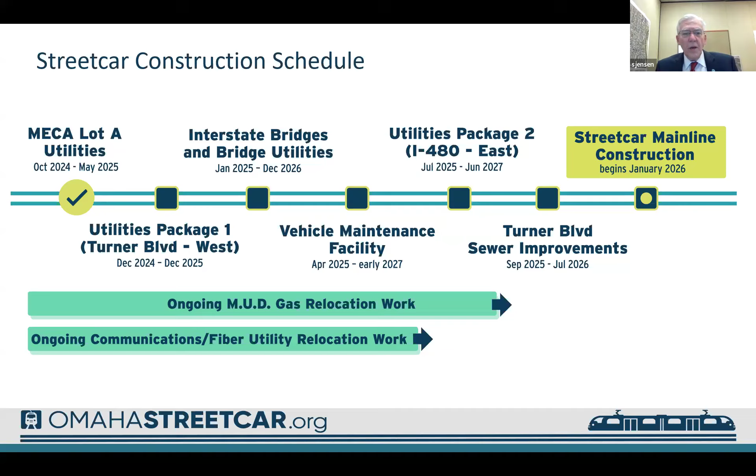Mainline construction work is going to begin right after the first of the year. MUD gas relocation work is continuing; Megan will talk about that. And then ongoing communications and fiber utility work throughout the whole corridor is underway and being coordinated with the other work. So with that, I'm going to turn it over to Megan to talk about MUD work.

Thanks, Steve. Hi, everyone. MUD has completed relocating the gas mains along Harney between 10th and 19th Street in the Old Market area. Our gas service work for the JAMS building is completed, and the excavations for this work have been turned over to the city for repair. The alley work behind the Dubliner is completed, but work continues on the remaining gas service in this phase for the Voodoo Taco building.

The crew has completed extending the gas main along 11th Street from Farnam to the north side of the Voodoo Taco building and has installed the new gas service. This building's gas service will soon be reconnected. The crew is currently backfilling excavations and should have the street repair turned over to the city by the end of this week. Traffic continues to flow on 11th Street.

However, parking in the area continues to be impacted. We do want to point out that the big parking garage located at 12th and Harney is available for parking, as well as other parking garages.

I also want to point out the fact that every single one of these businesses continues to stay open. So if you would like to continue to go to these businesses and support them, that would be very much appreciated.

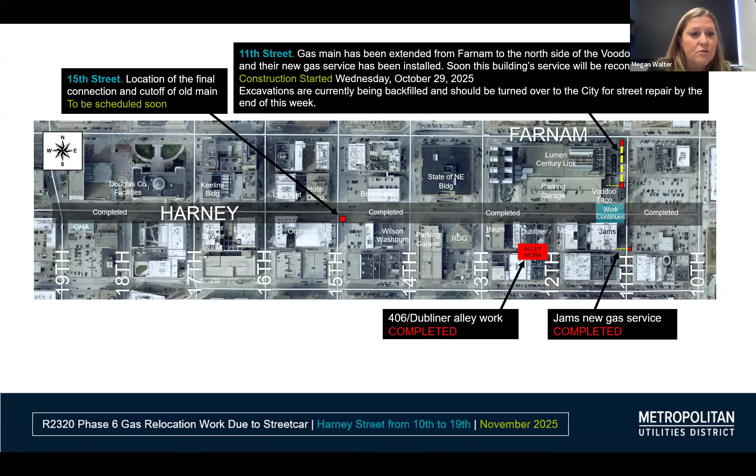Drivers and pedestrians are advised to use caution near excavation in this area. Soon, the final connection will be scheduled at 15th Street. The anticipated completion timeline for this corridor's work is within about 1 month.

Our next phase, phase 5, is Farnam between 19th and 28th Street. MUD has completed the gas main installation along Farnam Street between 24th Street and 26th Avenue. Crews have begun gas service work in the 25th Ave for all makes building, and will soon perform service work in 26th Ave for the Farnam Hills building. These two services are being relocated off Farnam Street.

Lane restrictions will be in place for this work. All available excavations within the project area have been turned over to the city for street repair, and traffic control measures have been removed where possible. Work also remains on Farnam between 19th and 20th Street, which will be scheduled at a later date. Phase 5 work is anticipated to be completed in early 2026.

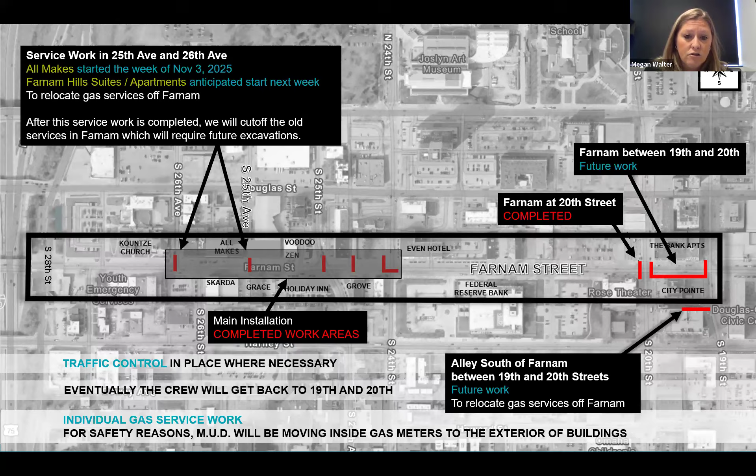Our next phase, phase 7, is Harney near I-480. Our gas main installation work for phase 7 is now complete. Individual gas service work is continuing to happen along this corridor. Please watch for lane and parking closures associated with this activity.

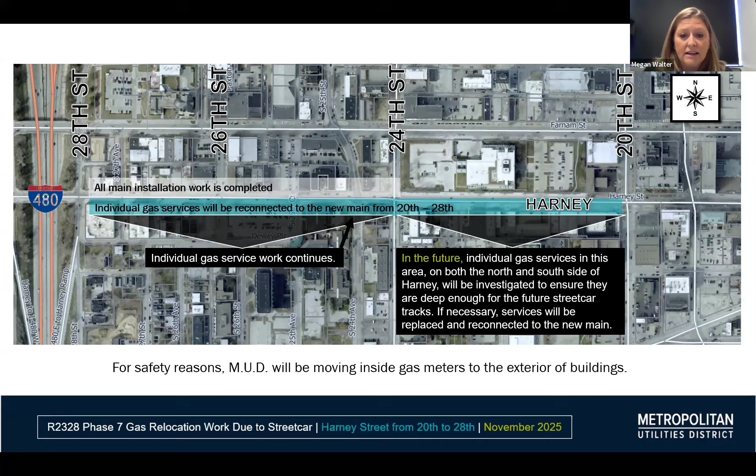This fourth slide shows all 8 phases of the MUD gas relocation work. Work in phases 5 and 7 continues, and phase 6 is nearing completion. Our final phase of gas work is phase 8, located near Turner Boulevard.

We anticipate this will start in approximately 2 weeks at the intersection of Turner Boulevard and Farnam Street. Traffic control in this area is currently being considered by MUD and the city of Omaha, which could include closing Turner Boulevard so the work can be completed as quickly as possible. So please be watching out for that.

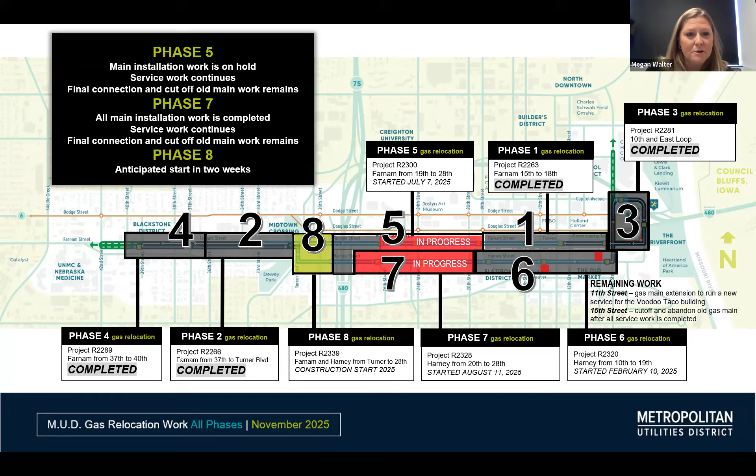Now I'm going to turn it over to Mike True and Steve Rue to discuss the vehicle maintenance facility, West Utility Package, I-480 bridges, East Utilities Package, Turner Boulevard Package, and mainline construction. Mike, I think you're up first on the vehicle maintenance facility.

Yes, I am, Steve. Thank you. So, vehicle maintenance facility, just a quick recollection of where this is at. East End, there's a loop, 10th to Capitol, Douglas to Farnam. This is kind of the northeast corner, near the Luminarium. You can kind of see that general area in the left picture up on the top side of it.

For those of you who've been down here, we've been finalizing our foundations and getting all the steel set and all that concrete poured. It looks right now just basically like a big concrete slab surrounded by an open field that's been tore up. But excitingly enough, in November, about another week or two, we're going to start seeing this structure go vertical. There's a crane down there now that's getting assembled to start putting pieces into place.

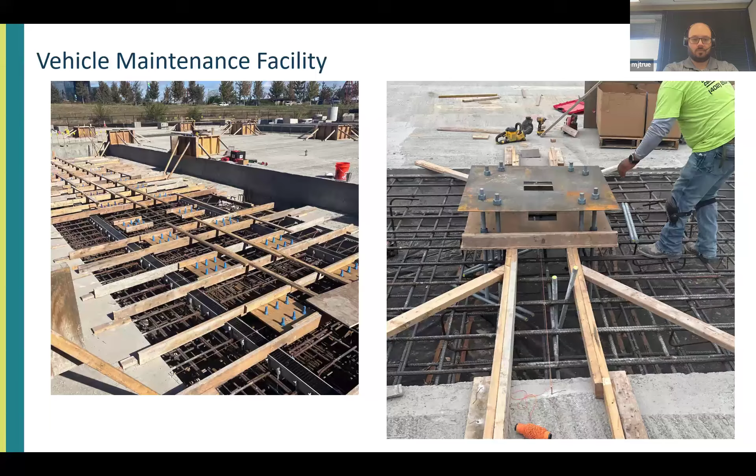The vehicle maintenance facility is on track to generally be open in the first part of 2027, with the streetcars set to arrive that summer. And we'll have more updates as we continue along. And then I believe next is Mr. Rue.

Awesome. Thanks, Mike. I'm going to work through our utility packages in the order that they came online. So starting with the West Utilities package, this started back in January, and we are rapidly approaching the end of this first package here. So we started back on Turner. We've been working west right now. We're in this phase 3 from roughly 37th Street through 40th.

Obviously, the really key issue that's going on right now, we have that full closure at 38th and Farnam as we work through some water main connections there. Right now, we believe that that work will be complete still in the 4-week time frame. So that started October 20th, and we are looking at that another week and a half from where we're at here to get that poured back. We should have updates as we get closer to finishing out that work.

For the rest of this phase, we're still just doing the same work that we've done in the previous phases. So we're finishing out water main work, sanitary work.

When that all gets put back and poured, all the pavement gets put back, then we'll see that CIPP lining crew come in and do the structural lining of the sanitary sewer, just like we've done for the other two phases. We'll kind of start seeing this wrap up.

Right now, phase 1 is completely done. Phase 2, we're working through what we call punch list items, just a few little things left behind here and there. Phase 3, we're coming to the end, and we'll see that punch list situation happen again. This first package is really coming to a close here.

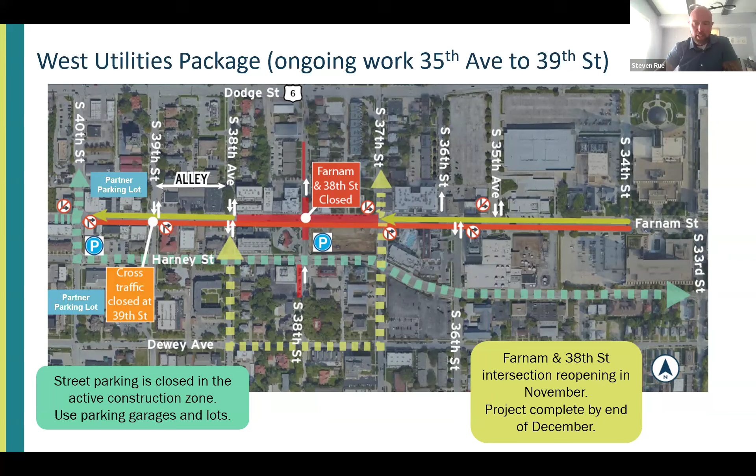So that's where we're at with this package — we're coming to an end. Going to the bridges, like Steve Jensen mentioned, going awesome. First bridge is almost complete. We're going to look at demoing Farnam going into next year.

If you go through there right now, we still have the closure coming off of 480. The target date we have for opening that exit ramp off of 480 is 11/14 — two Fridays from now — and that'll be a straight through to Douglas. We still have some signal work and paving to put back, but we are going to open that exit, so you'll be able to go straight through to Douglas and take that back to the east.

We're anticipating the rest of the work related to the full opening of the bridge to be completed by the end of the month. We should have all the bridge work that's left, which is very little if you drive by, plus a lot of the signal work, some paving, and the ADA ramps that need to go back in. We're hoping to see that all completed by the end of the month, allowing full access through that intersection with our brand new bridge.

Some other work happening over there — if you drive by on 480, they're pouring the slope protection under the bridge. The west side is currently being graded out, and the east side is actually halfway poured down the hill, so you can kind of see that usual concrete slab under bridges taking shape.

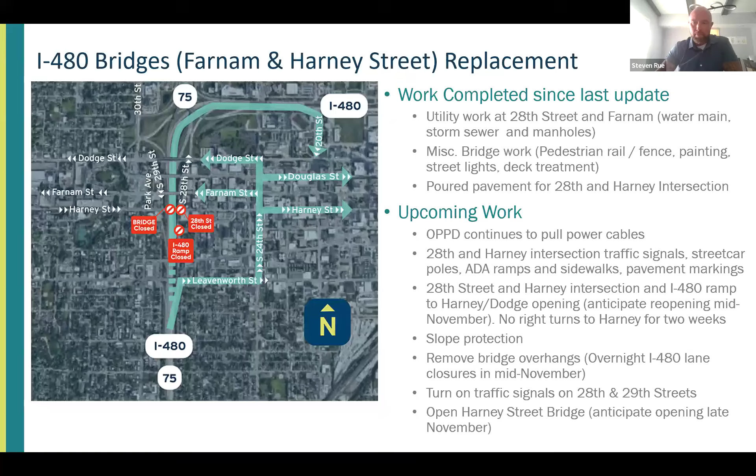8th and Douglas, there's a pretty substantial amount of work still to be done under there. We have sanitary and water work still to do, so that's going to be later in the month. Moving out west, to summarize, there will be some access, but as we close up one area, we just move those crews another block or two and continue that work. Hopefully the route you need will become open, but those crews are not going to go away - they're just going to keep sliding west and moving through intersections as they go.

Other work we have going on: Farnam from 10th to 15th, that's happening right now. Harney 19th to 17th, it's actually kind of like 18th to 20th now - we have electrical work going on out there, as well as Farnam from 18th to 20th. And then I think we have Harney from 19th to 24th. That has not started yet, but that is upcoming.

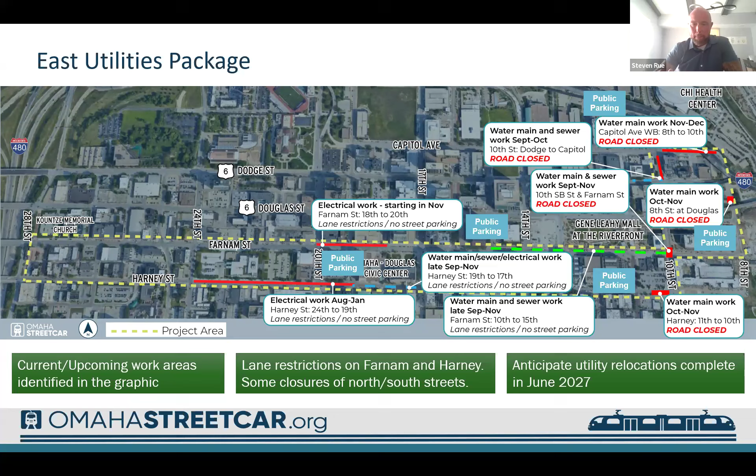Turner utility package - this is again the smallest footprint package that we have of all the utility packages, but it is a really complex project. It involves some very deep sewer manhole work that needs to happen here. Right now, most of the work that's occurred to date has been a lot of potholing and locating, ensuring we understand where all the structures and pieces are, that we have them documented, and that we're doing our shoring design for this very deep work that's going to occur here.

Coming up in January, this intersection will be fully closed for 4 months to do this work. It is not safe to keep this intersection open - not safe to the traveling public or the construction crews that are there. I know we're 2 months away from that, but this intersection at Turner and Farnam will be fully closed for 4 months to accommodate this work.

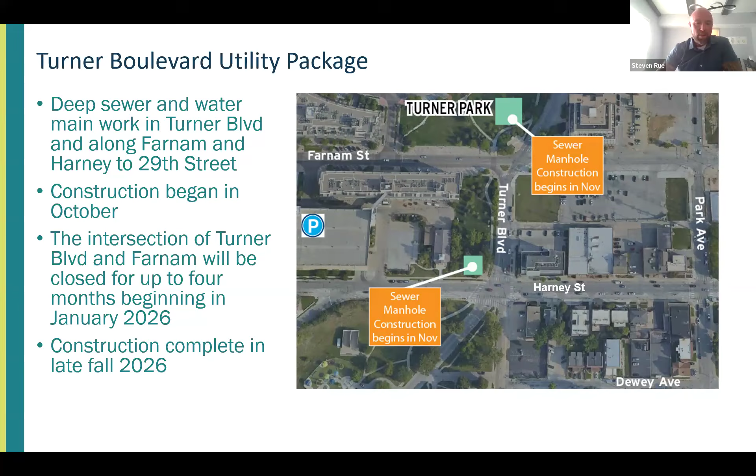And I believe the next slide is mainline, and Mike is going to talk about the mainline.

Thanks, Steve. So mainline construction, as you just heard with Turner, begins in the same area starting January 5th. Heading 1 is working a little past so crews don't interfere with each other. On the north side of Farnam, Kiewit will begin working along the westbound lane in the parking lane, tearing up and getting track actually laid in.

This will be exciting. These are the first direct streetcar elements, excluding what's happened down at the VMF.

The work included in the mainline construction are the stops, overhead electrical, underground electrical returns, conduit, and traffic signaling. Most of that's going to be just going pole to pole, traffic signal, or in the slab itself. It'll occasionally have drops that have to exit outside of that, but a lot of this work is linear. They're going to go one direction. It'll be a series of crews.

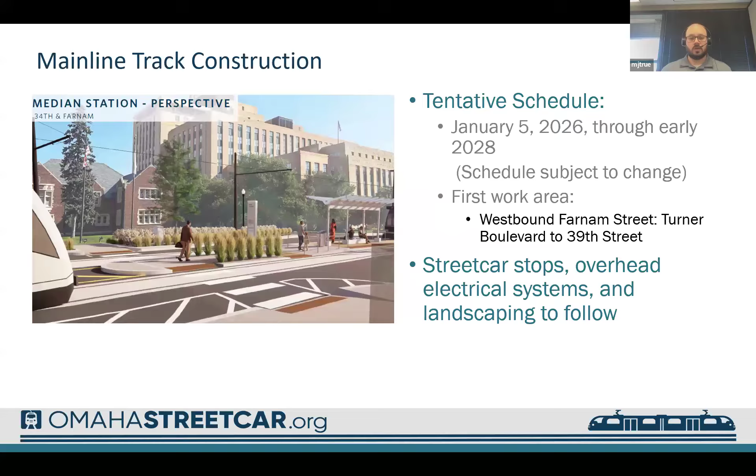We can get to the next slide. Let's see.

Following behind them, so real quick, the demo crew comes out and knocks out 1,800 to 2,000 feet at a time. They're one of the fastest crews that's going to come through. Following them will be a civil crew. They'll prepare subgrade, and there's some limited stormwater work along here. They'll also get a lot of your conduits in that actually have to get below the grade slab.

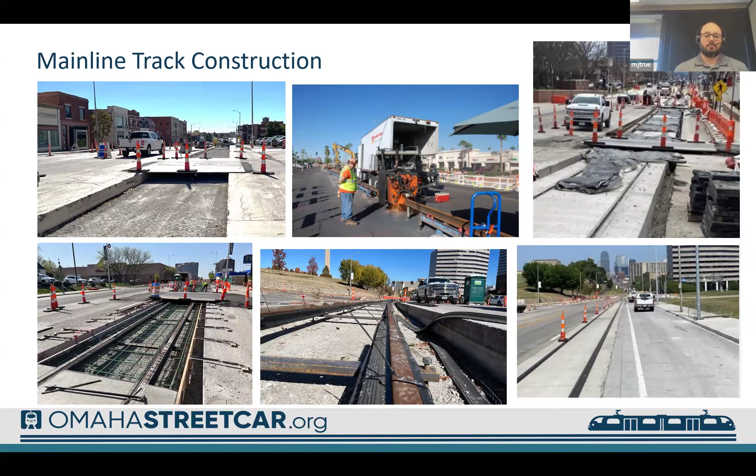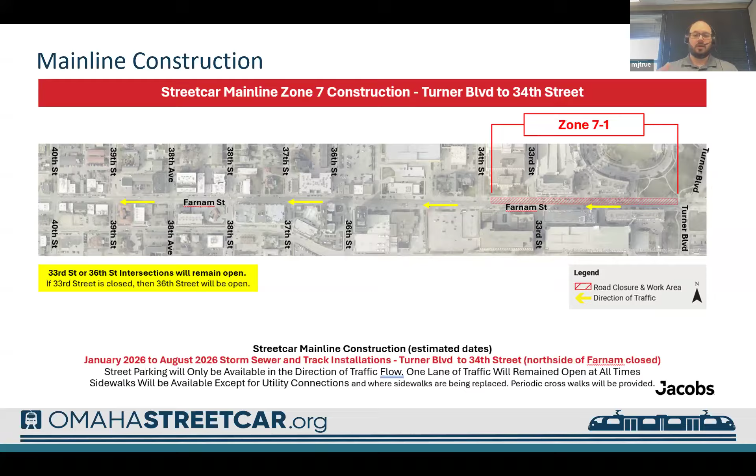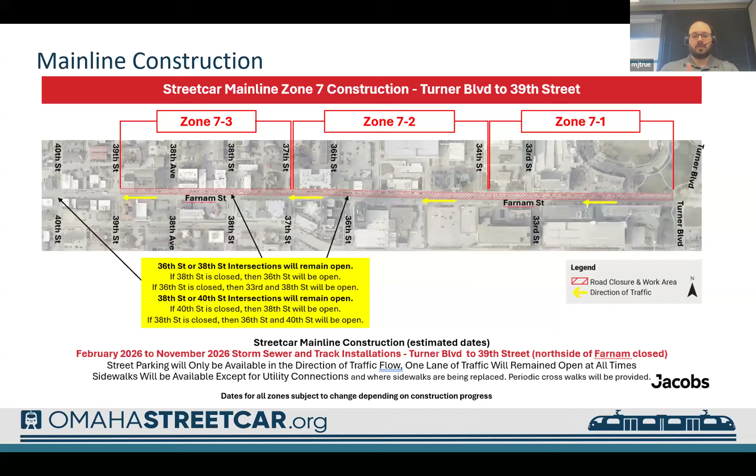And as this rolls along, the first crew comes in and demos, crew by crew. So zone 7-3 will have a demo crew over here, zone 7-2 will have the civil crew and probably some of the skeletonization crew as tracks get pulled into zone 7-1, with paving following up behind them. Then when this flips over, we'll have a little chicane that comes through and down around. You'll still have one continuous westbound lane, and then they'll take the south parking and south lane and just keep zipping along. You can hit the next few.

Oh, I guess it doesn't show the full part of it. My bad, forgot about that. Anyway, it'll come down the same way.

7-2 will flip down to 8-2. 7-3 flips down to 8-3. You'll have the whole south side done. They'll come through, finish that up, and then sometime towards the beginning of '28, they should be all out of there. That's somewhat due to the stops and other landscaping and tail end processes.

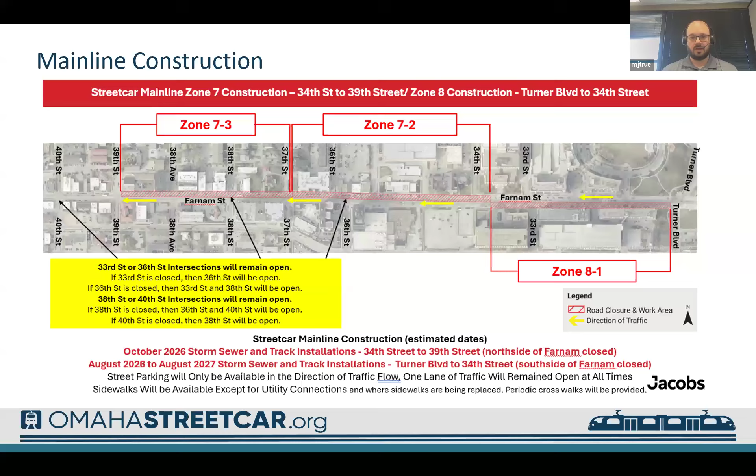And with that, we'll head over to business development, Mr. Jensen.

All right, thanks, Mike. So we understand the difficulties that construction work can cause, but there are a number of things that we're doing to try and help during this period. So I'm going to go through a quick list of some of the things that we are always working on.

The first is overall communication. So on the OSA website, omahastreetcar.org, you can find construction updates. You can find an interactive map that shows up-to-date information by area, frequently asked questions, and just a lot of other information about the project as a whole.

We also do weekly construction update email newsletters. If you haven't signed up for those, be sure you do. They're very helpful, outlining exactly what's being shut down, what's open, what the progress is, how long things will be under construction in different areas, and so forth.

We have these monthly construction update webinars. And then, of course, Wendy Thompson, who you met at the beginning of this webinar, is available and has a phone number posted, and she'll talk about that at the end. You can always get in touch with Wendy if you have questions.

From an accessibility standpoint, in those construction zones, we maintain sidewalk access to the businesses. Delivery access to the businesses is also coordinated. In the area west of I-480, we maintain one-way westbound traffic whenever possible.

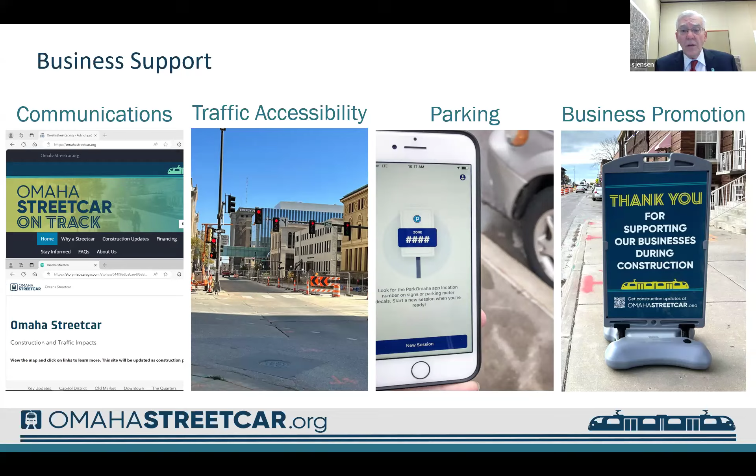So we do a number of things and we continue to work on that to try in any way we can to facilitate and help out the small businesses that are impacted during this construction period. So with that, I'm going to turn it back over to Wendy, and she'll discuss a little further the construction communications. Wendy? Thank you, Steve.

Your engagement and understanding are vital as we continue to build this transformative project for Omaha, and there are ways to get involved or receive information about the project.

Next month, we will not hold a webinar because the Omaha Streetcar Authority will host a public open house on Thursday, December 11th from 5:30 to 7:30 p.m.

At the Durham Museum, the open house will feature updated information about the ongoing utility relocations and track construction. Attendees will have the opportunity to learn about the project and visit with and ask questions of the construction team. There will be no formal presentation and registration is not required. If you're unable to attend in person, all of the exhibits will be available on the website following the open house.

Our next public webinar will be held in January. We will hold it on January 14th due to the holidays.

We understand construction can be disruptive, and we're committed to minimizing impacts and keeping you informed. To do that, we've developed a few key resources. First, a weekly email that Steve mentioned for you to get summaries of work, project progress, and milestones directly in your inbox. You can sign up on the website.

Our second is an interactive GIS map, which was developed to allow you to zoom in on your area to see specific project impacts. It's frequently updated with the latest, most accurate information. We encourage you to share these valuable resources with your neighbors, colleagues, and anyone interested in the project's progress. Our team is here to ensure everyone has the information they need to understand and navigate these changes. Please leverage our resources, reach out with your questions, and stay connected as the project moves forward.

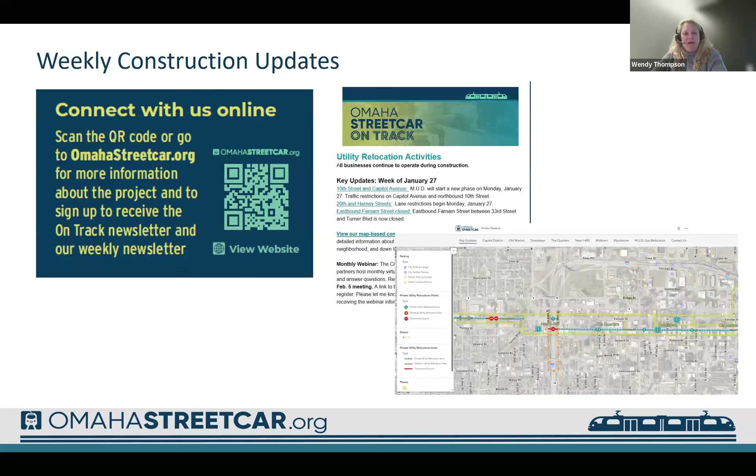Finally, if you have immediate concerns or would like more information from the project team, please contact Alyssa, the city's Media Relations Manager in Public Works, or myself by phone or email.